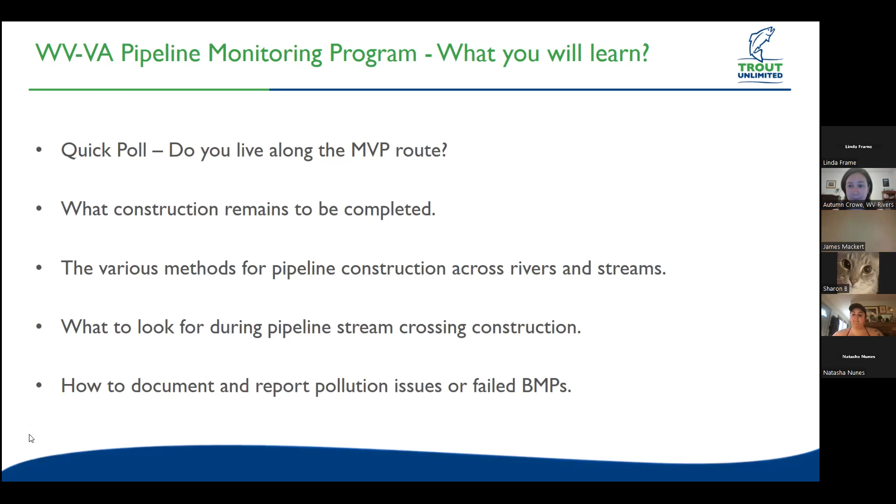There are approximately 549 stream crossings remaining along the Mountain Valley Pipeline route. About 429 of those will be open trenching, where they dig a trench right through the stream bed. Another 120 locations will use underground boring to cross another 181 water bodies, with boring lengths ranging from 1,250 feet to 300 feet, so they vary in length.

I'll go into more detail about the different boring techniques, but the pits vary from 5 feet deep to 45 feet deep, and some of the longer borings can take up to 4 months to complete. They'll be doing continuous boring 24/7 for 4 months to finish those.

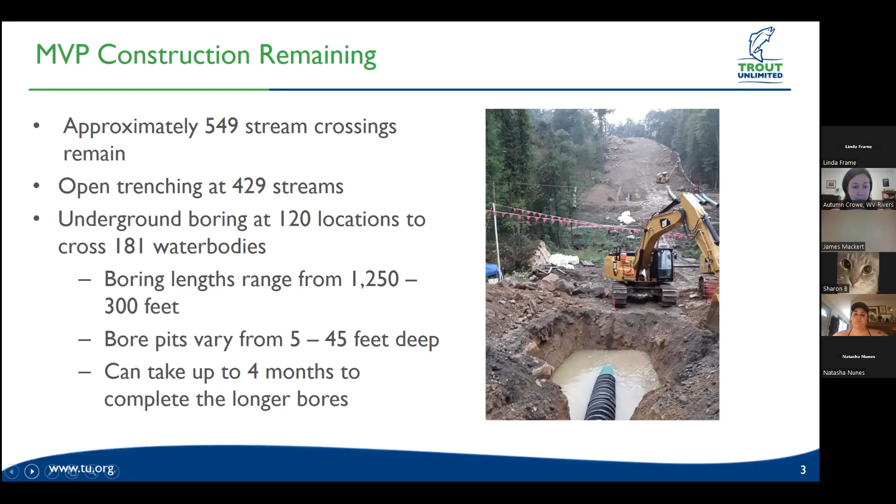If you're interested to see which streams remain, Mountain Valley Watch has developed a really great online interactive mapping tool, so you can zoom in and see which streams have been completed and which stream crossings remain. That'll be useful for finding out whether streams in your neighborhood are still remaining to be crossed. The link to that map is in the chat for anybody interested.

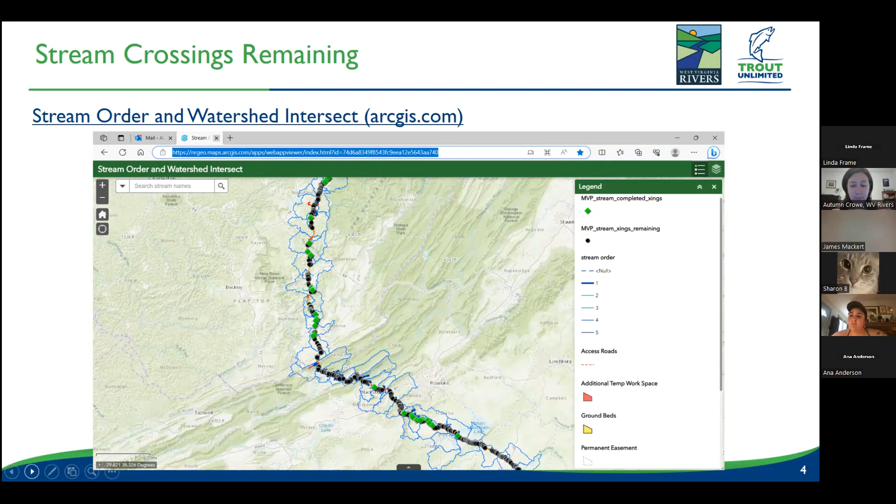So why are we so concerned about Mountain Valley Pipeline construction? The construction impacts can have a lot of effects on water quality. They can destabilize the stream banks and stream beds when digging an excavator through them, causing increased erosion in the stream bank and bed. It also removes riparian vegetation, which increases stormwater runoff and sedimentation.

The dewatering of stream beds for prolonged periods, when they dam the stream and do construction in a dry stream bed, disrupts feeding and breeding and can cause death in aquatic species if they're not removed from the dewatered areas. We also have potential accidental spills of fuels, lubricants, oils, or drilling mud used for underground borings. Any accidental spill can degrade water quality, and multiple crossings within a watershed can have a cumulative effect from all these impacts compounded together, so these stream crossings can have a serious impact on our rivers and streams.

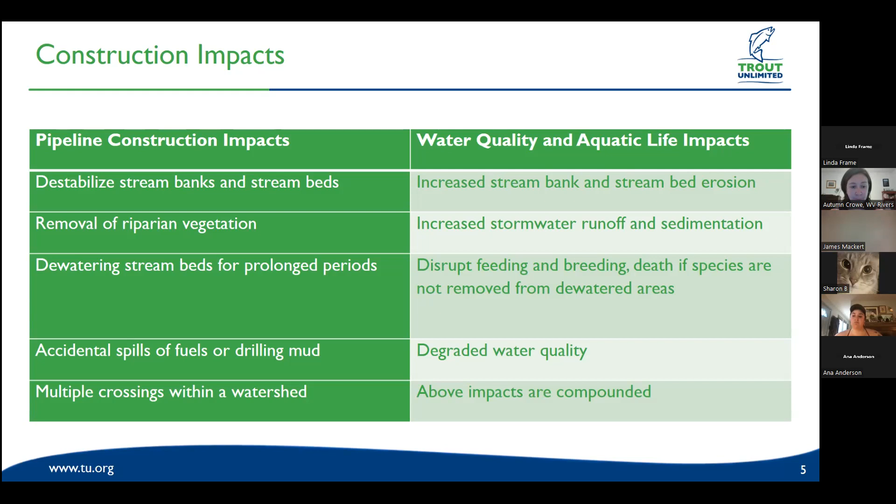There are several methods Mountain Valley Pipeline will use to construct the pipeline through streams. There's the wet crossing method, an open cut through a stream where water is currently flowing, but I don't think they're going to use that method. They're mostly going to use dry crossing methods, where they open cut and dig a trench through the stream bed in a dry area, using several methods to create a dry construction area.

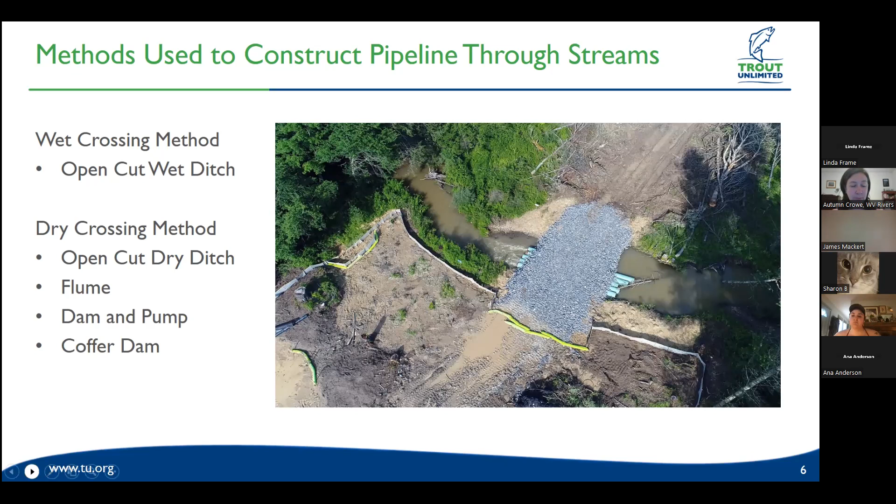So the dry ditch method is when there's no water flowing through the stream, like an ephemeral or intermittent stream. There's no water diversion needed because it's a dry stream bed, but there is stream bed disturbance and scouring that could occur when water does flow back through during heavy rain events.

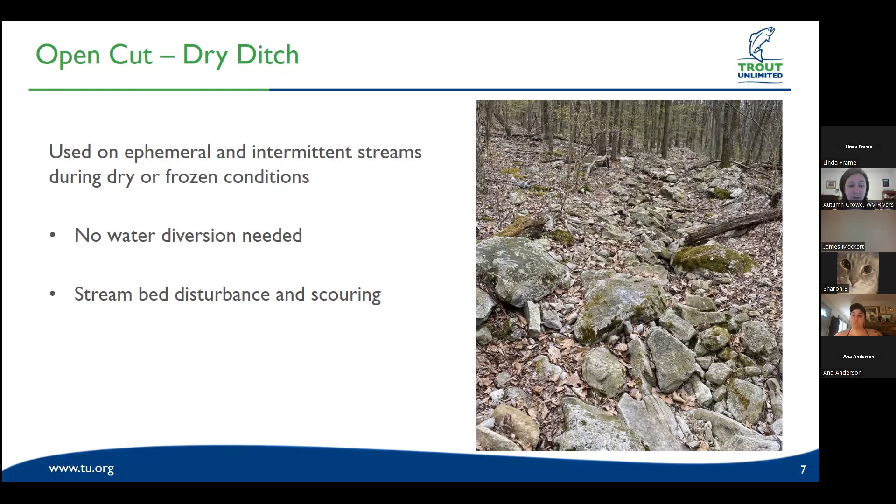And then the dry crossing method is where they remove the water from their construction area. The dam and pump is a dry crossing method, so they'll dam the stream at the upper end, dewater their construction area, and pump that water around past their dams.

That method minimizes the release of sediment because you're working in a dry area, but it creates barriers for fish movement and impacts immobile species like mussels or benthic macroinvertebrates that can't move once it's dewatered. The dams are also susceptible to mechanical failure of either the pumps or the dams, which can introduce sediment-laden water into the stream.

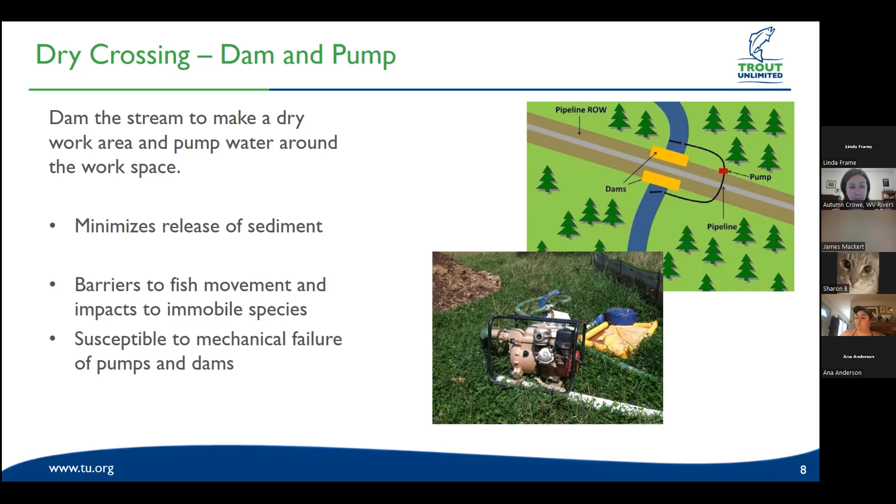Now, the boring methods - there are several different boring methods. There's a conventional bore, where they bore under the stream bed and run a pipe through the borehole. There's microtunneling or direct pipe, where they pull or push the pipe through, and then there's horizontal boring, where they can actually steer the drill bit.

The benefits of boring under streams is that the stream bed remains intact, so there's minimal disturbance to the stream bed and banks. But the boring methods still require a large amount of water and drilling mud or bentonite clay, like a slurry mixture, to lubricate the drill bit. There's a possibility of a bentonite blowout, which is when the pressure is so great around the drill bit that it can actually fracture the stream bed.

And then there's the risk of failure of dewatering devices. When they're dewatering their bore pits, they're digging those trenches under the water table, and then they fill with water, so they're having to constantly dewater those bore pits, and there's a potential for failure of their dewatering devices. There's also another risk of deflection of the drill bit, where it can veer off course.

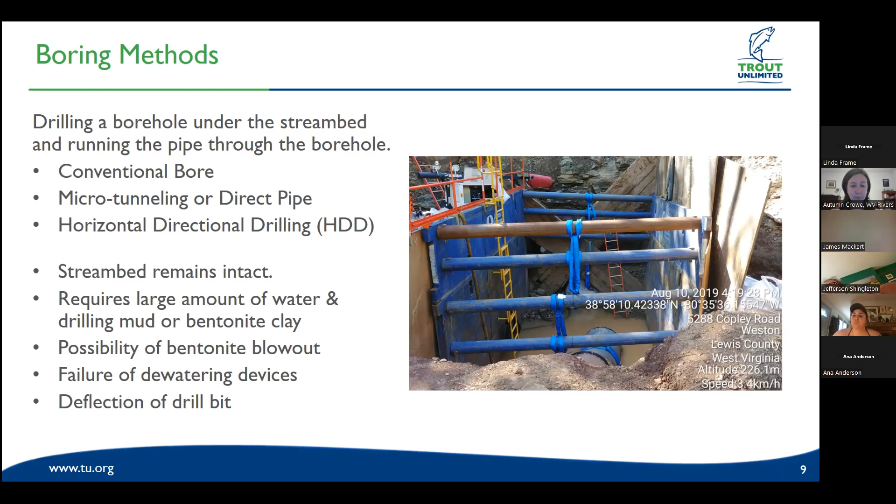So the conventional boring method is where they have two pits on either side of the water body, and they just bore straight through under the stream bed. The pits are excavated to the depth needed for the pipeline to pass under the stream channel, and the boring machines are lowered into the pits - those pits might need to be quite large. Once excavated, the pipe is pulled through the bore pit to the receiving pit.

So these are some of the things that you might see in the field once construction starts.

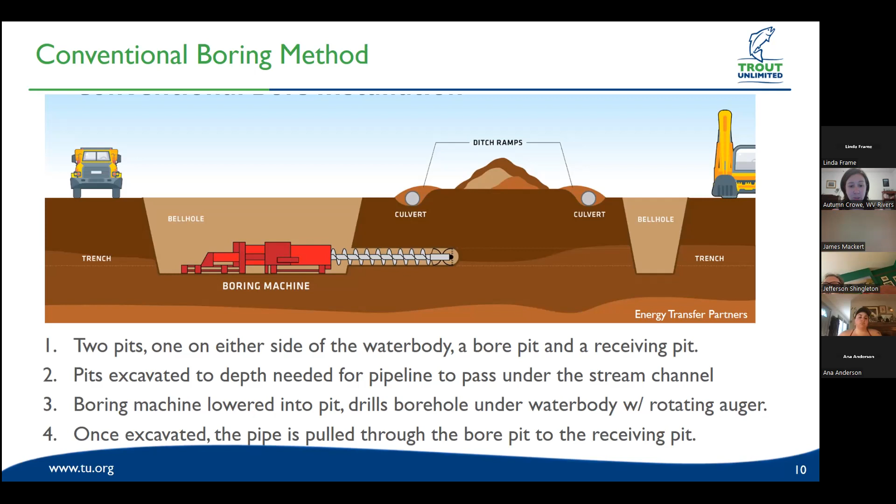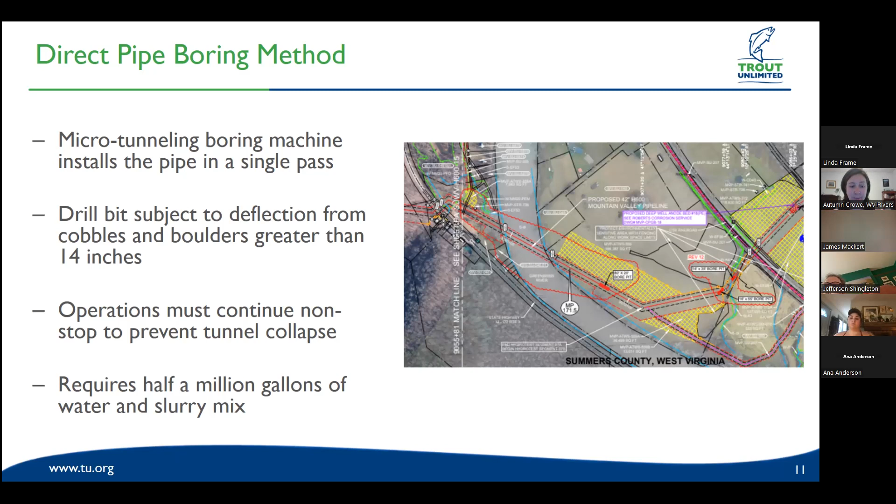The direct pipe boring method - this is the method they're using on the Greenbrier River. It's a micro tunneling boring machine, and it installs the pipe in a single pass. The drill bit is subject to deflection from cobbles and boulders greater than 14 inches, and operations must continue nonstop to prevent tunnel collapse. This particular boring is going to require 500,000 gallons of a water and slurry mixture, so there's potential for some accidents to occur if not done properly.

Some of the best management practices you'll see at the bore pits are stockpiles of soil and drill cuttings. They should have a protective cover over those spoil piles, like hay or mulch or some kind of vegetative matting, to prevent runoff if there's precipitation. The dewatering devices I referred to earlier are usually stacked straw bales with a filter fabric, so they pump all of the water out of the bore pits into these devices, and the water filters out while the sediment remains.

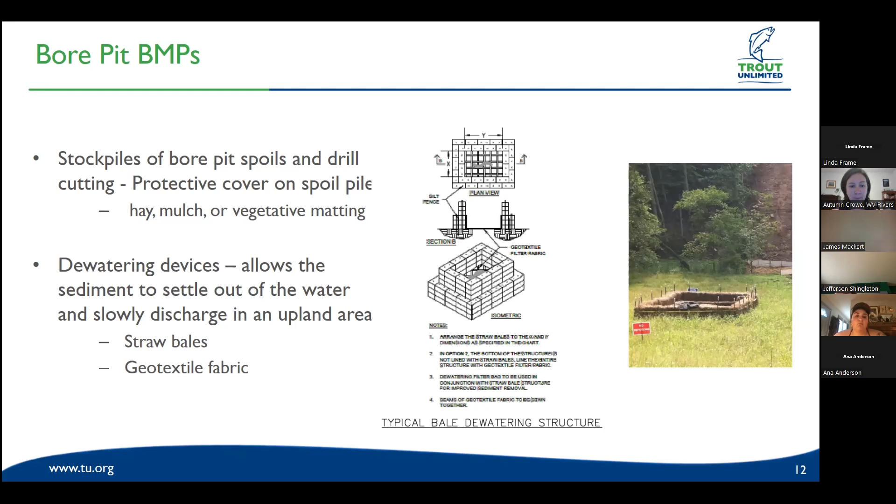Some of the other best management practices you'll see at stream crossings: they'll have a timber mat bridge to get their equipment across the stream, and they'll need sediment barriers around that bridge so that when it rains, mud tracked onto the bridge doesn't run off into the stream. They also have to have silt fences protecting the stream, with multiple layers of silt fences and filter socks to make sure no sediment gets in, and hay or mulch on any disturbed areas to prevent erosion.

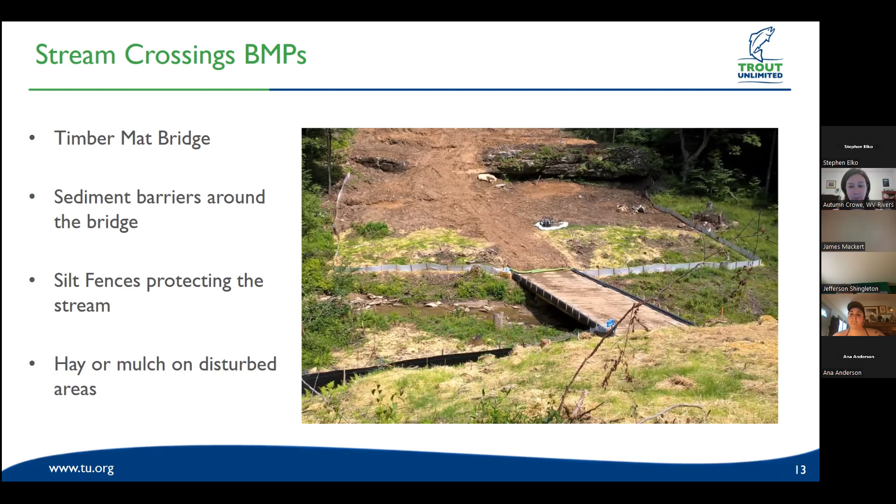So those are some of the methods that they'll be using as they start construction. We are hearing that that could happen in the next couple weeks.

So what to look for when you're out visually assessing the construction activities. If you see stream water that's discolored with a sediment plume, such as the photo pictured, it's really important to try to investigate upstream to identify the source of that sediment.

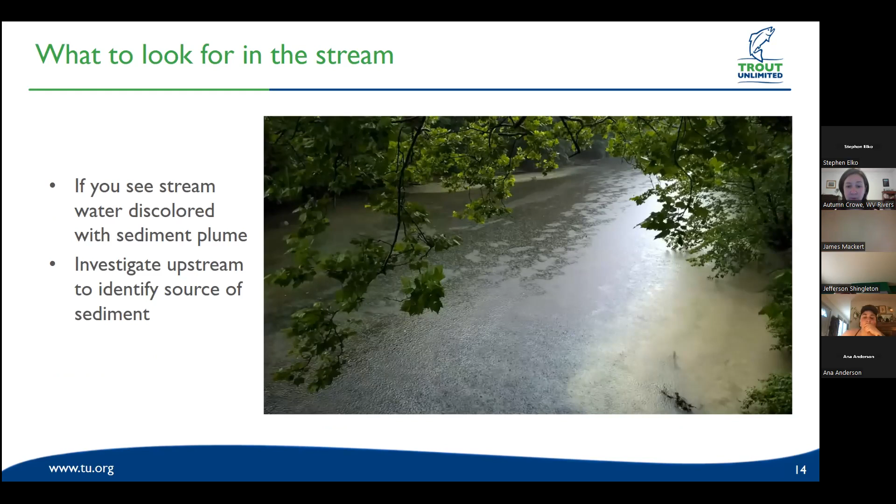You'll also want to look out for sediment-laden water bypassing their erosion control. This is basically muddy water runoff that's leaving the construction site, bypassing erosion controls, and then sediment discharging outside of their construction area. All of their erosion controls are meant to prevent that from occurring. So if any of those instances are occurring, that's something that we want to report to regulatory agencies.

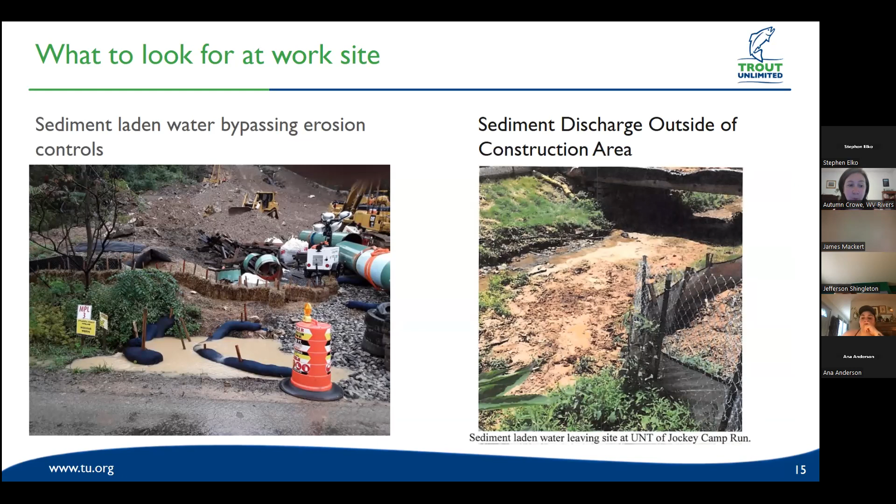Additionally, to look for at stream crossings, the stream flow should be diverted away from the disturbed ground. That was the dry crossing method that I referred to earlier. You want to make sure that the water is being diverted, and any muddy water is going into a dewatering device, so there shouldn't be any muddy water flowing directly into the stream. They should have best management practices in place around the stream channel to prevent any erosion or sedimentation from entering that stream. And then you'll want to compare downstream conditions with upstream conditions.

If we got a heavy rain event and the water is just as muddy downstream as it is upstream, then we know that their devices are working. However, if the water is really muddy downstream and you go upstream from their construction site and the water is clear, then we know that something from their construction site is running off and impacting that stream, and that would be a violation of their permit conditions.

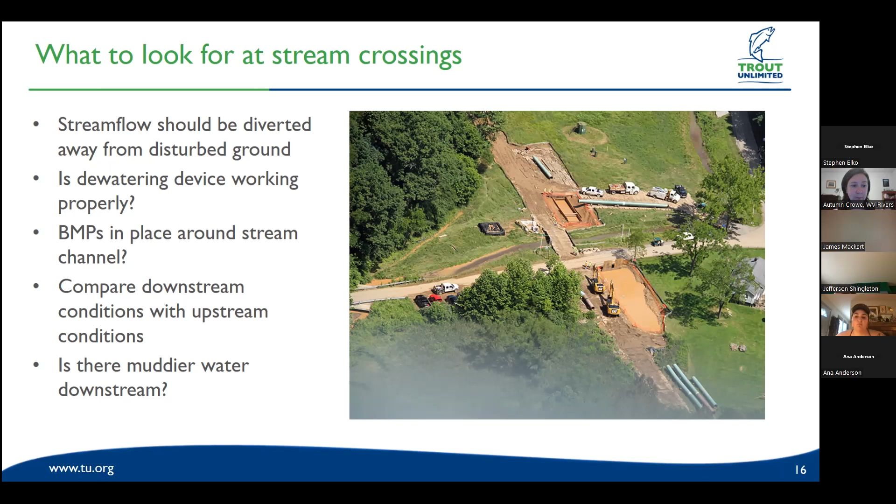So again, I referred to those bore pits that they'll be digging to put in their machinery to bore under the streams. The groundwater is going to be entering those trenches or bore pits, because they're going to be digging below the water table. So all of that muddy water should be pumped into a dewatering device so that the sediment can remain in the dewatering device and the clear water will be allowed to flow out.

They shouldn't have any releases of sediment laden water into streams. That would be something you would want to report.

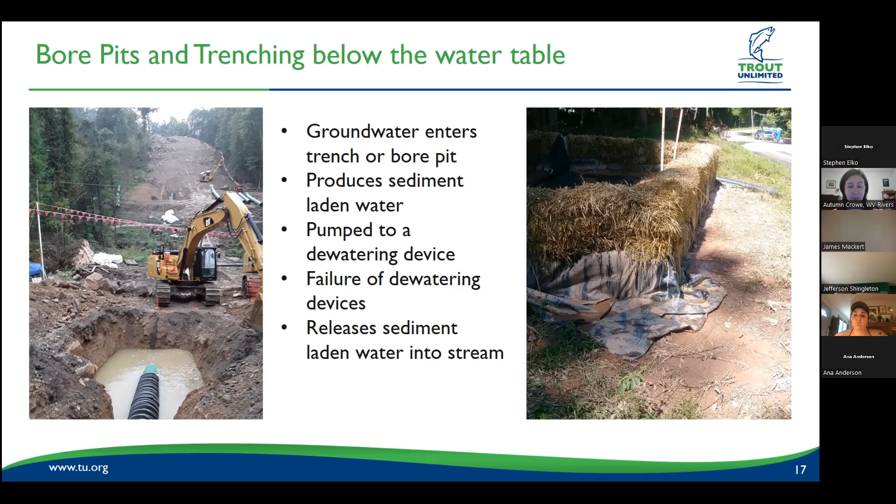So just general personal safety considerations. If you're going out monitoring, first of all, you always want to be courteous to the landowners, the pipeline workers, or anybody else that you meet along the way, and avoid confrontations. Respect private property, seek permission from landowners before entering private property, and then do not enter any active pipeline construction sites. They're going to be operating heavy equipment. They're not going to be expecting the average person, like the general public, on those construction sites.

So it would be very dangerous for any monitor to enter an active construction site as they're operating that heavy equipment. You'll want to conduct any visual assessments from public roads or on private property where you have landowner permission to access. And then obviously don't put yourself in any kind of physically dangerous situation, like trying to wade into a stream during high water to get a view upstream. We want to make sure you stay safe as you're out there monitoring.

And then if you see anything that is a public health or safety hazard, don't feel like you have to contact us first. You can contact your local emergency management.

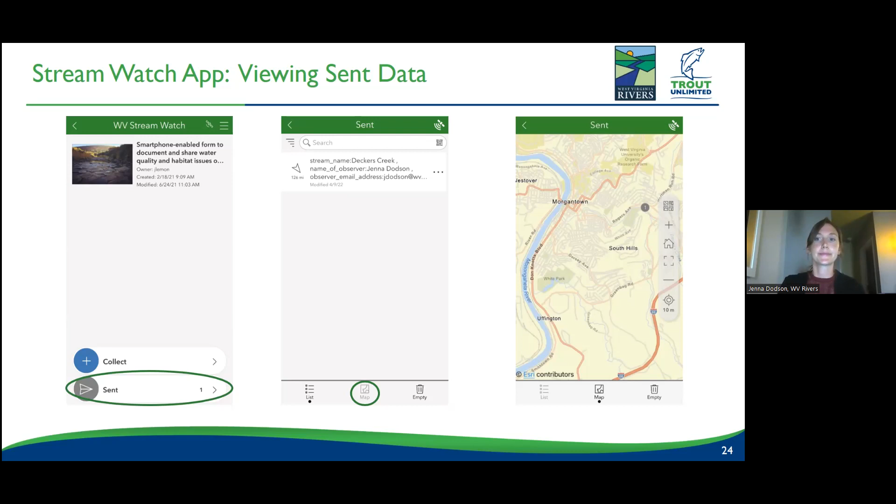Some tips on how to document issues and what makes effective photos: take both wide angle photos and close up photos of the issue, trying to strike a nice balance between detail and context. And as Autumn said, document upstream and downstream of the impacted area - it would be best to photograph the stream both above and below the impacted area if possible, noting that you can travel downstream to document the extent of the issue, if possible.

We encourage you to travel upstream to document the source of the issue. The most effective photo is one showing a water quality violation, such as the ones Autumn described, with the source visible behind it.

As I said before, it's helpful if you describe the issue you see in the comments. So let's say you can see the extent of the issue downstream, but it's difficult to capture in a photo - that might be something you want to note and add additional information to in the comments section.

After submission, we will follow up with you - we, being West Virginia Rivers or TU, will follow up within 24 to 48 hours. If it's submitted on a weekend, that would be the Monday or Tuesday after. We will review those submissions to determine whether it's a reportable incident, and if it is, we'll submit that information to the appropriate agency and follow up with you with the agency response. So again, that's where the contact information fields come into consideration.